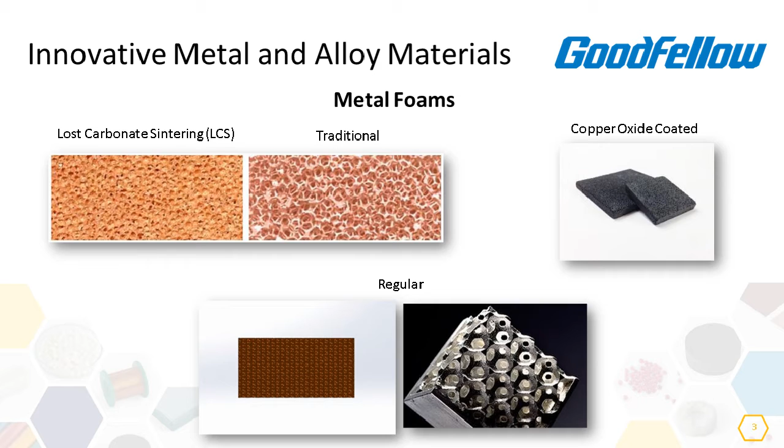On the right of the slide, we can see the copper oxide coated foams, which are manufactured with a thin hard layer of copper oxide. This hard layer is improving their thermal performance as low heat sinks in passive cooling environments, for example, while it is enabling electronic devices to minimize their carbon footprint, which is very important.

In general, for applications of metal foams, there are a lot, but I'll just pick some of them. So in this case, we can see metal foams used as heat exchangers or energy absorbers, or they can be used also as air-oil separators, acoustic applications, filters, electrodes, etc. Specifically, metal foams having high strength can act as high-capacity impact energy absorbers. In the automotive industry, metal foams are reducing the number of parts in the car frame, and they can facilitate the assembly. Thereby, the cost can be reduced, and the performance, of course, can be improved.

Due to their high surface area and their open cell structure, metal foams can be used in filtration systems and in catalysis processes. For example, a research project published in Nature Scientific Reports used our Goodfellow nickel foam in a photocatalysis experiment. The foam has been used as a scaffold template for graphene to produce a graphene foam. This 3D hybrid material shows interesting perspectives as a charge transfer material, and that's a very innovative application, I would say.

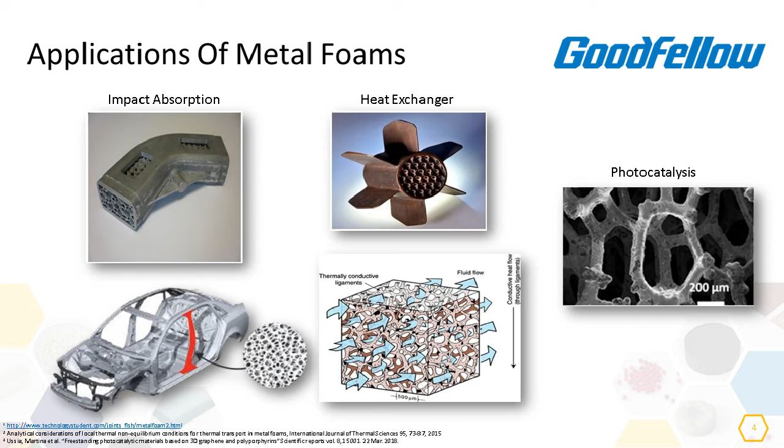On the next one, I'm presenting some metal and alloy materials, and specifically nanoparticles. Nanoparticles are a wide class of materials that include particulate substances which have at least one dimension less than 100 nanometers. Nanomaterials and nanoparticles are used in a broad spectrum of applications. Today, they are contained in many products and used in various technologies.

There are two strategies to produce nanoparticles: either by mechanical crushing of source material using milling processes, or by physico-chemical processes. Goodfellow nanoparticles are produced via a physico-chemical process, actually a green process, which enables us to manufacture high purity metal or alloy nanoparticles, or even metal oxide nanoparticles, with different shapes or sizes, as we can see beneath. They can have a needle form, spherical or cubical forms, or even be irregular nanoparticles.

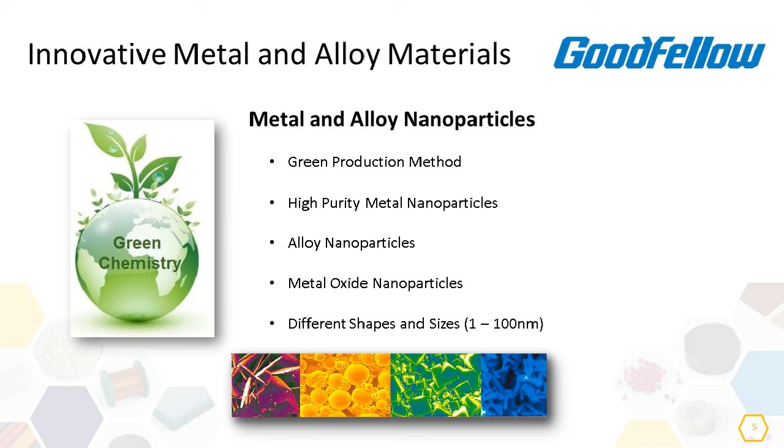The next slide is very busy, but I have done that intentionally. Nanoparticles and nanotechnology are helping to considerably improve, even revolutionize, I would say, many technologies in the industry sectors. For example, platinum nanoparticles can be used in hydrogen fuel cells. Hydrogen fuel cells are clean energy alternatives that use hydrogen and oxygen to generate electricity. Currently, platinum metal is used in electrodes for the fuel cell as a catalyst.

Platinum nanoparticles, though, can improve the efficiency with an increase in the material's catalytic activity and reduce the metal usage due to their high active surface area to volume ratio. This reveals an efficient and more cost-effective solution for where hydrogen fuel cells can be used. They will be used in automotive, and we will discuss it.

Being influenced by the current situation, COVID-19, I'm going to give some bioengineering examples. Gold nanoparticles are well known to have excellent optical, electronic, physical and chemical properties, and demonstrate surface plasmon resonance. For these reasons, they're used in biomedical applications. All these features can be altered by changing shape, size, or attached functional groups. As a result, they have been used in various biomedical applications such as sensors, targeted drug delivery, imaging, photothermal and

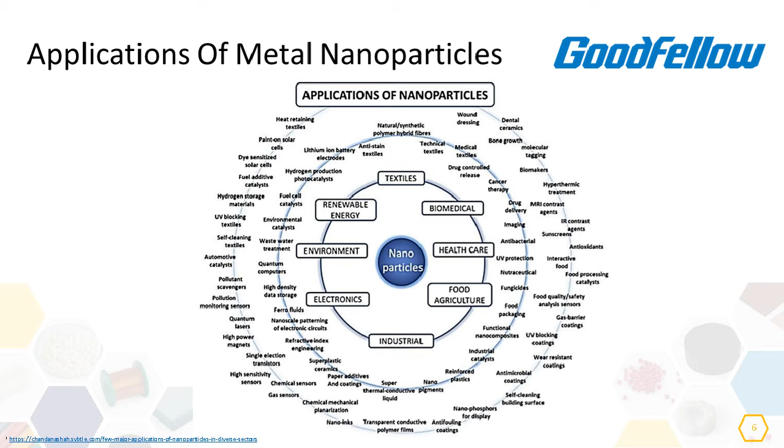photodynamic therapy. Another example is copper oxide nanoparticles, which have also been used in many bio applications such as biodetectors, as they can display enhanced antimicrobial activity towards pathogenic microorganisms. They have been used even in advanced sanitizers and antibacterial face masks. Other general applications of nanoparticles include electronics, reinforced plastics, superplastic ceramics, wear-resistant and anti-corrosion coatings. They have been used for chemical sensors or technical textiles called smart textiles, etc.

People in general know that ceramics are very hard and brittle materials, so difficult to machine into more complex shapes. These ceramics are usually used to manufacture tiles, bricks, and pottery, and are called traditional ceramics. Examples of these traditional ceramics are clay minerals or quartz sand. The more technical ceramics, which we are going to talk about, are used in extreme environments and applications and are less frequently encountered. These ceramics have properties that make them unique, such as machinability. Yes, we can machine ceramics.

In terms of technical ceramics, machinable is the term we use when the material can be turned, milled, drilled and sawn without diamond tools, unlike traditional ceramics, where diamond tools are usually needed for the majority. One of those machinable ceramics is Shapal Hi-M Soft, which we can see in this slide. Shapal consists of aluminum nitride and boron nitride. Apart from its excellent machinability, it demonstrates high thermal conductivity, five times higher than alumina, and high strength while being an excellent insulator.

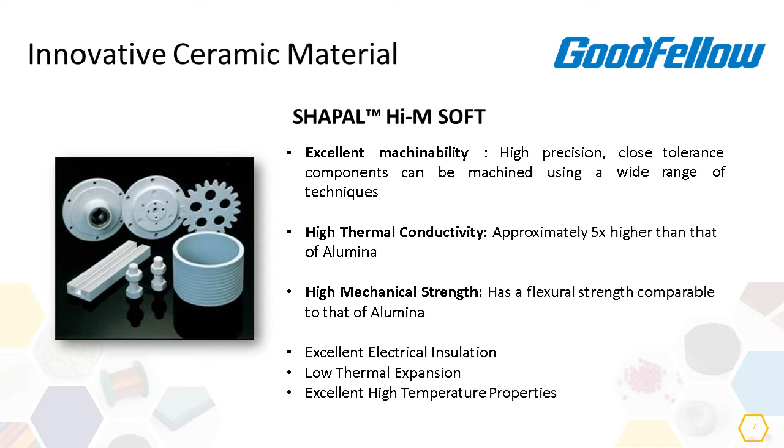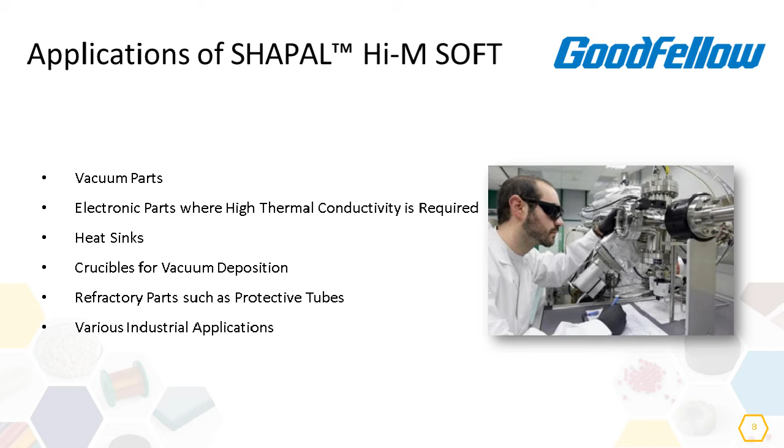There are several applications where Shapal can be or is being used, such as vacuum parts. For example, at CERN, they are using Shapal spacers in their vacuum structures. Also electronic parts where high thermal conductivity is required. They are also being used for heat sinks, crucibles for vacuum deposition, and various other industrial applications.

On this slide I will discuss perovskites, which is another compound, a chemical compound. Perovskite materials have recently attracted significant attention as the most promising and efficient energy materials for optoelectronic and photonic devices. A perovskite material has a complex crystal structure, as can be seen in the slide, and can be produced by combining two different cations.

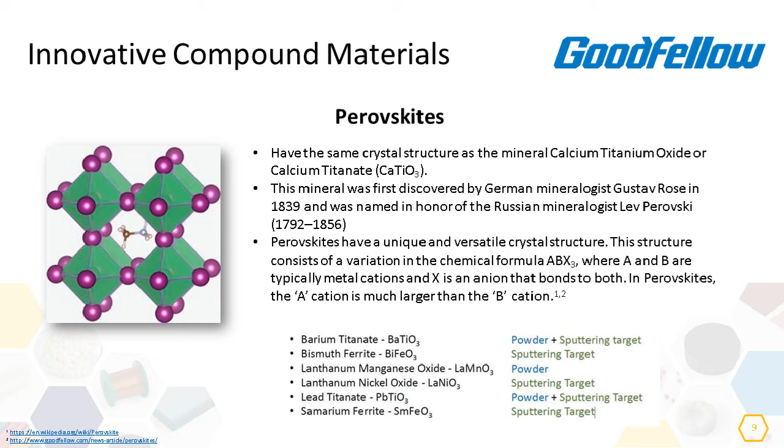Perovskites are usually deposited, and they are called layered perovskites; they are deposited as epitaxial thin films on top of other perovskites by pulsed laser deposition or molecular beam epitaxy. Thus, in our catalog range, you can find perovskites in two different forms: sputtering targets or powders. The complexity in their structure combined with the layered structure leads to tunable properties, and that's very important.

So, due to their lattice, perovskites are characterized by special properties like superconductivity, magnetoresistance, piezoelectricity, ferroelectricity, dielectric and pyroelectric behavior. In addition, a wide range of elements can be combined to form perovskite structures, providing the possibility of selective design, for example, and to optimize their physical or optical or electrical characteristics.

Layered perovskites can be considered as a new class of materials with confined quantum structure with huge potential for optoelectronic and electrical applications. As we can see on this slide, perovskites can be used in photovoltaics, electrical batteries, or as multi-layer capacitors like in fuel cells, or even next-generation display screens, memory devices, and high-temperature superconductors.

Everybody has discussed, I think, or has heard about lithium-ion batteries. So we're going to discuss this. In 1991, Sony commercialized the first lithium-ion battery, and today this chemistry has become the most promising and fastest growing on the market. Lithium-ion batteries are a family of rechargeable battery types, having several advantages over conventional lead-acid batteries. Many are used in portable devices.

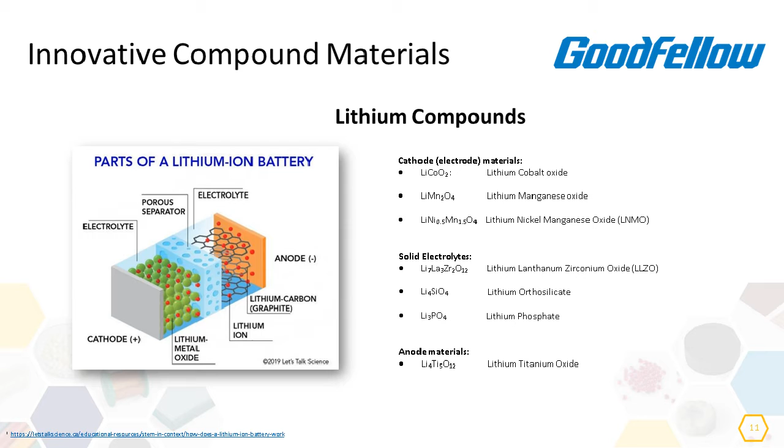Lithium-ion batteries offer power solutions across the spectrum, from energy storage solutions to portable energy solutions. Some of the most common applications of lithium-ion batteries are power backups, UPS, mobiles, laptops, and other commonly used consumer electronics goods. Renewable energy is a growing market, even in the transportation sector, and lithium batteries will play a key role in this sector too.

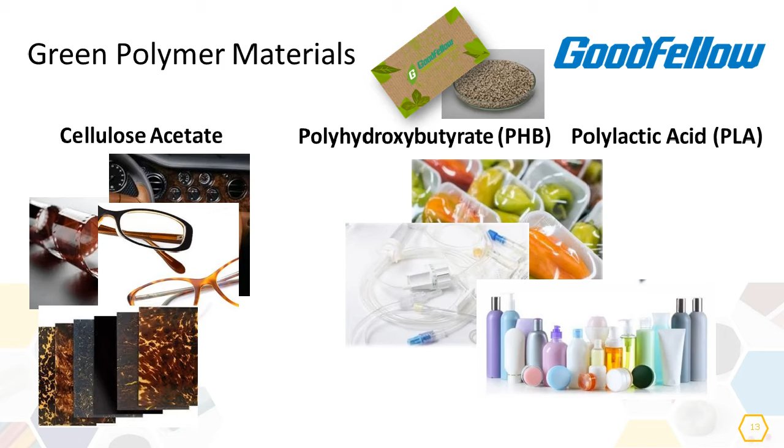One of the most well-known nanomaterials that we are going to discuss, and with a great impact on research and industry, are the carbon nanotubes. Carbon nanotubes are cylindrical molecules consisting of rolled-up sheets of single-layer carbon atoms. Their length can reach several micrometers to millimeters.

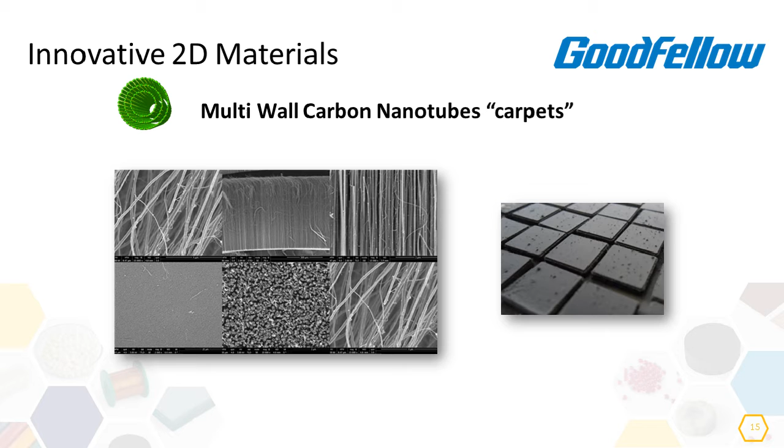Carbon nanotube nanocomposites are highly attractive alternatives to conventional composite materials, such as carbon fiber composites. That is due to their mechanical, thermal, chemical, and electrical properties, such as conductivity, tensile strength, or even flame retardancy. These composites promise to offer increased wear resistance, strength, and antistatic properties, as well as weight reduction. Due to their hollow interior, they can be filled with various nanomaterials, separating and shielding them from their surrounding environment. This property is extremely useful for drug delivery applications.

They are also used in sporting goods, such as bicycle frames, tennis rackets, and golf clubs. Due to their antistatic property, carbon nanotubes can be used in textiles, which are called, as I mentioned before, smart textiles. Being lightweight, high-strength materials, carbon nanotubes can be used in the automotive and aerospace sector. It has been estimated that aircraft weight can be decreased by 30%, and that's very important.

Due to their electrical properties, as they are extremely sensitive to the effects of charge transfer, they can be used in sensors to detect, for example, gases, such as flexible hydrogen sensors, which currently use single-wall carbon nanotubes and palladium nanoparticles. Also, due to their electron transfer capabilities, they can be used as electrodes, an alternative to graphite, as we discussed, for example, in lithium-ion batteries.

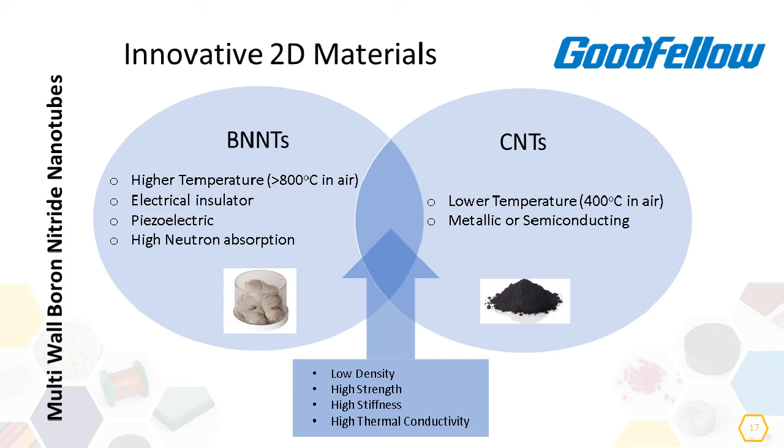Another class of nanomaterials similar to carbon nanotubes are the boron nitride nanotubes. Boron nitride nanotubes are lightweight and mechanically strong like carbon nanotubes. However, they are more thermally and chemically stable than carbon nanotubes. In addition, they have 200,000 times higher thermal neutron absorption capacity than carbon nanotubes, and they are electrical insulators. This is very important for applications that we are going to see in a while.

For example, boron nitride nanotubes can be used as filler in polymers such as PMMA, polymethyl methacrylate, PS polystyrene, or polybutylene as well, enhancing the heat dissipation capacity while maintaining their electrical insulation. These composite materials can be used in IT devices, such as in PCBs. Due to their high surface area, they can be used in catalysis for removal of environmentally hazardous elements. For example, the conversion rate of carbon monoxide can be higher in a catalytic converter of the exhaust.

They are suitable material for containers for radioactive waste, and they can be used as neutron shield and absorber material in general. Their enhanced chemical inertness favors their biocompatibility as well. Thus, they can be used for drug delivery systems.

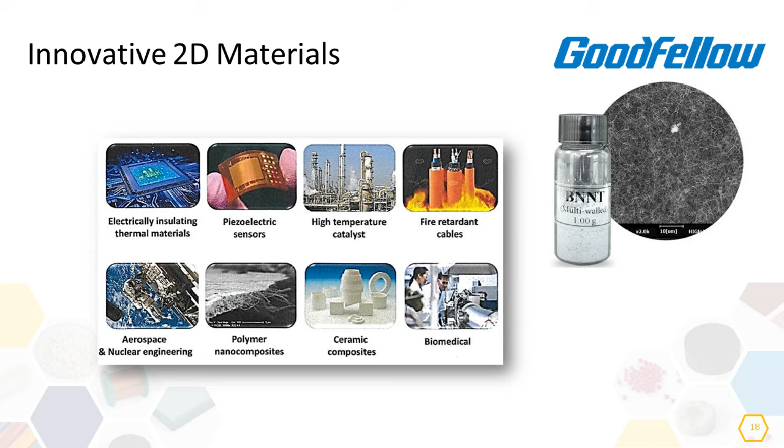Everybody, I think, has recently been introduced to the graphene world or has recently learned or heard about graphene. Graphene has been the subject of important investigation since its isolation in 2004 from graphite at the University of Manchester, resulting in a Nobel Prize in Physics for researchers Andre Geim and Konstantin Novoselov in 2010.

Graphene is a disruptive technology, yes, we can say that, a wonder material, one that could open up new markets and even replace existing technologies of materials. It is a one atom thin crystalline form of carbon, in which carbon atoms are held together by very strong bonds, arranged in a two-dimensional honeycomb lattice, as we can see in the pictures.

Goodfellow here is presenting the only high purity green graphene produced by a highly scalable chemical-free process. This process involves breaking methane, a potent greenhouse gas, as we know, which is a harmful byproduct of processes like farming, landfill, or palm oil milling, into elemental hydrogen and carbon in a plasma reactor.

The elapsed time of the process in which the graphene is formed is less than 1 second, and that's very important because we can understand the high scalability and the quantity that we can make during this process. Goodfellow offers two types of green graphene: a predominantly one-layer graphene obtained by special heat treatment, and a few-layer graphene.

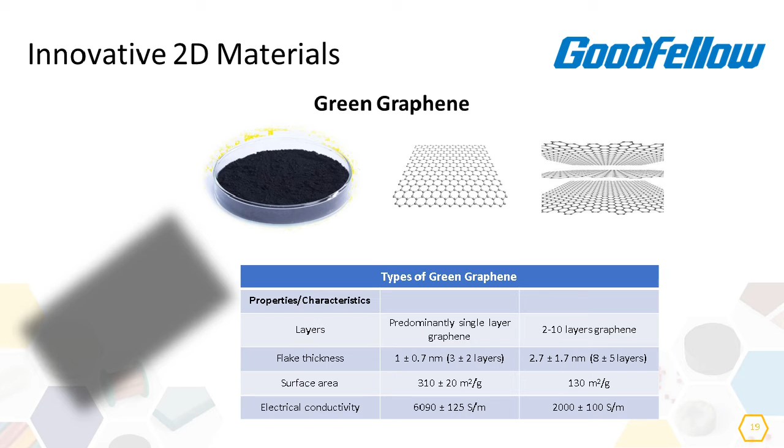The process, as we said, is green, and it doesn't involve any additives or catalysts or metal impurities, resulting in a very high purity graphene, unlike other commercial graphenes, which usually contain metal impurities because they are produced by a CVD method, where you are using metal catalysts. The resulting graphene is characterized by optimal electrical, thermal, and mechanical properties.

Ford first used graphene polymer composite foam in Mustang and F-150 models, and these composites have proven to improve the mechanical properties by 20% and the heat endurance by 30%, while noise reduction has also been encountered. The important thing is that all these benefits came without any penalty to the weight of the car.

It is also used in aerospace, enhancing the mechanical performance of the parts while producing a lightweight material. Another application of graphene in aerospace is a special graphene coating for the de-icing of airplane wings, and this is currently under research and development. In construction, it is explored as a self-healing cement composite material.

Also, it can be used in water desalination membranes, which are mechanically robust, and its nanosized pores, together with its reactivity towards polar or non-polar water pollutants, maximize the water permeability while it separates particles based on size, shape, and charge. In addition, functionalized with proteins or other groups, graphene is also used in medicine as drug delivery systems.

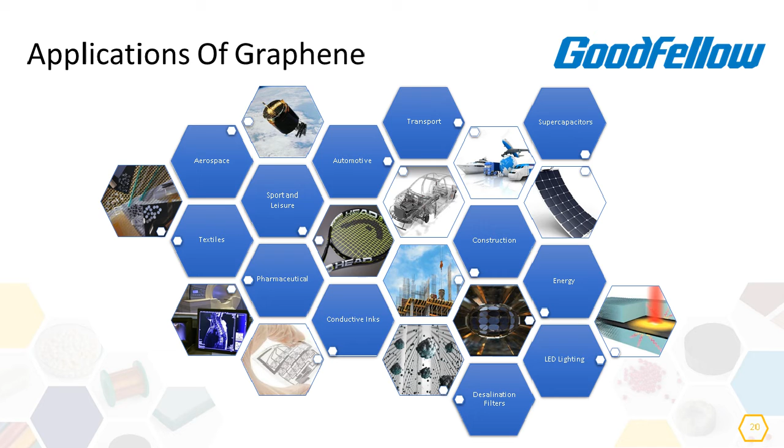Graphene has also been used in sporting goods such as rackets and training shoes. While being a lightweight material, the training shoes by Inov-8, which is a company in the UK, have outlasted others by 1,000 miles and are scientifically proven to show 50% better wear resistance. And last but not least, it can be used in smart textiles due to its electrical properties.

We have discussed throughout this presentation nanomaterials and their implementation in polymer matrices. As we have already mentioned, nanotechnology plays a crucial part in all industry sectors, even in 3D printing applications. 3D printing almost dominates our daily life, and it is expected to continue having a significant impact in all industry and R&D sectors for several years.

While sustainability is of great interest and a challenge for all research and engineering areas, Goodfellow combines these emerging technologies and is offering two 3D filament composites. One filament is PLA, or polylactic acid, enhanced with graphene, demonstrating enhanced properties such as strength, thermal conductivity, anti-static, and dimensional stability.

And the other filament is PLA enhanced with spherical nanodiamonds, offering high thermal conductivity. Since the nanodiamonds are spherical, this filler is less abrasive than other fillers generally used for composites in 3D printing filaments, because the other filaments in general have irregularly shaped fillers.

This one, because of the filler and the spherical shape, is leading to lower nozzle wear and offering enhanced printing speed due to their lubrication properties.

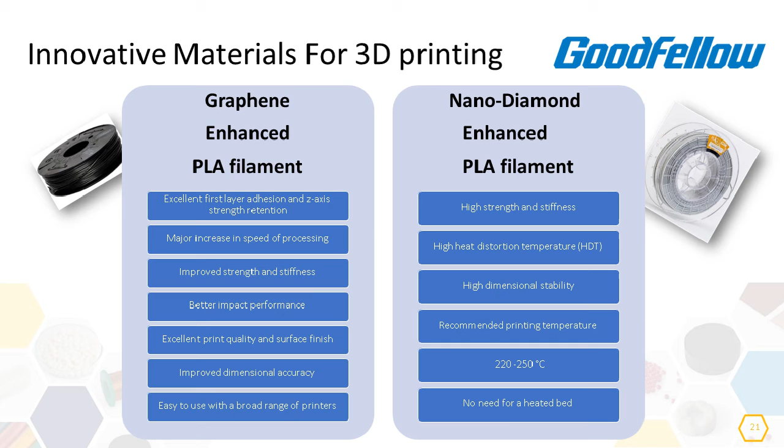Concluding, I would like to mention that we have gone through a small sample of Goodfellow's comprehensive range of materials, which can be used in advanced, modern, or traditional technologies.

Moreover, Goodfellow offers a range of high-quality green materials supporting our customers' environmental performance enhancement. By selecting high-standard and high-end unique materials, Goodfellow is playing a critical role in facilitating engineering, innovation, and research. For any technical inquiries and other technical support, please contact us at technical@goodfellow.com. Thank you very much, and thank you for listening to this presentation.

Thank you very much, Aphrodite. We have time for a few questions here. I'd just like to start with this one: what are the advantages and disadvantages of perovskites?

Advantages of perovskites: first, the battery production process is simple. It is often produced in laboratories or in industry by phase deposition or vapor deposition processes, liquid gas mixed deposition processes, which are very simple. Also, the battery power cost is low and could even be lower than thermal power. Perovskite can be built very thin, producing thin film batteries, which can be deposited on glass, and you can control the thickness of each layer and material to achieve different levels of transparency or efficiency. Applications might include very lightweight batteries.